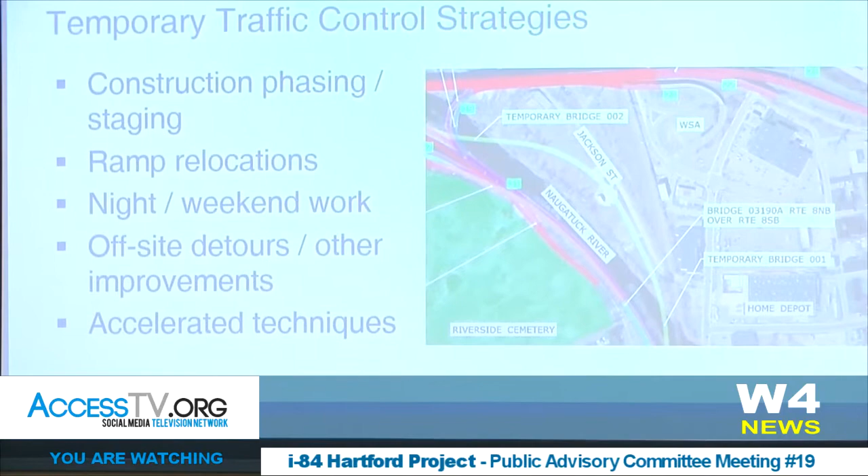So those temporary traffic control strategies really get into the nuts and bolts of the construction staging. This is a cool image that our friends at DOT gave us for something they're doing down in Waterbury, where they're building a big, long, temporary bridge over the Naugatuck River. It's really looking at how you're constructing little pieces of the project and moving stuff around.

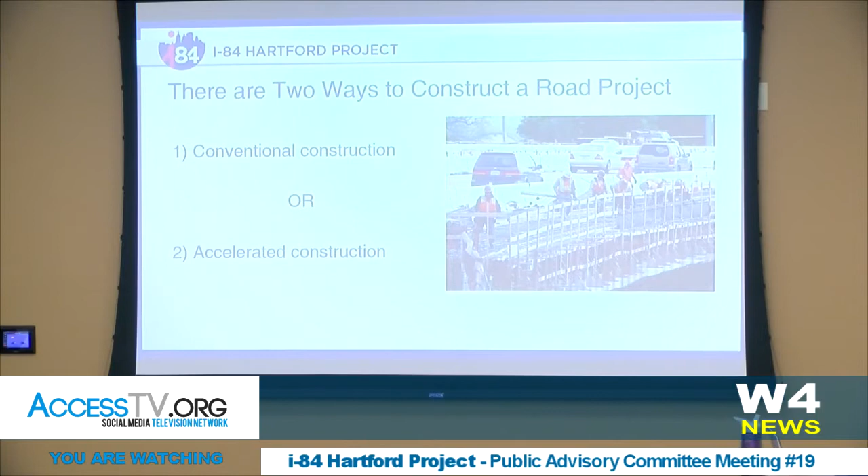When we talk about how things are built, I'll throw out terms: conventional versus accelerated construction. In reality, this project will end up being built as really a mix of both. Conventional construction is based on maintaining all the lanes of traffic, moving traffic over a little bit, building a little bit more. It typically ends up with a longer duration, and can involve lots of temporary roadways or temporary structures, which can add to the construction cost.

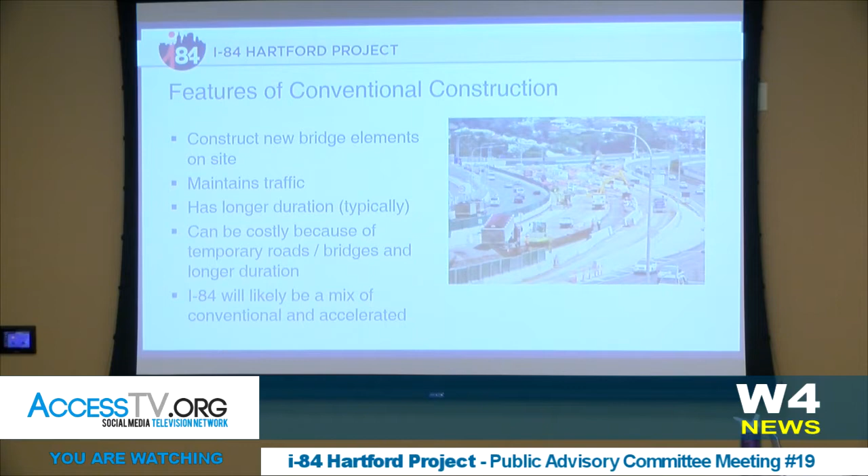Again, I-84 will likely be a mix of that with some accelerated portions as well. There are some examples of recent significant projects around the Northeast done in that same manner, mostly conventional with some accelerated pieces. Many of you are probably familiar with the Q Bridge down in New Haven, the recently completed Waterbury widening on I-84, and of course the Central Artery, where they took down an elevated urban viaduct like we're dealing with here in Hartford.

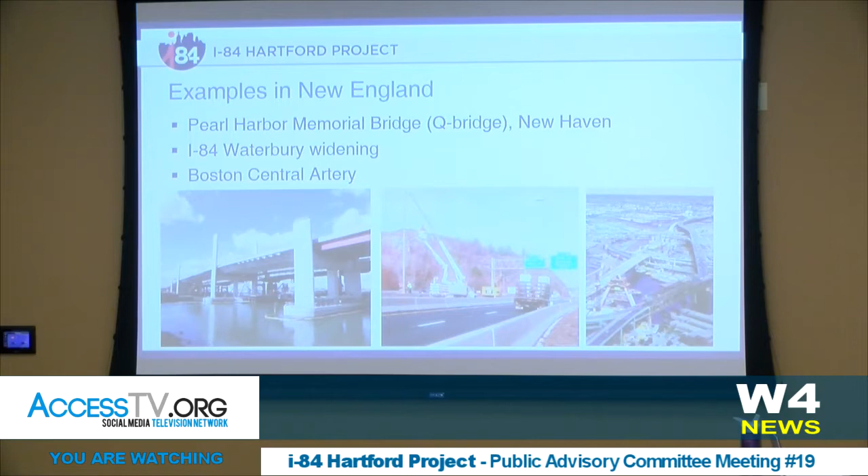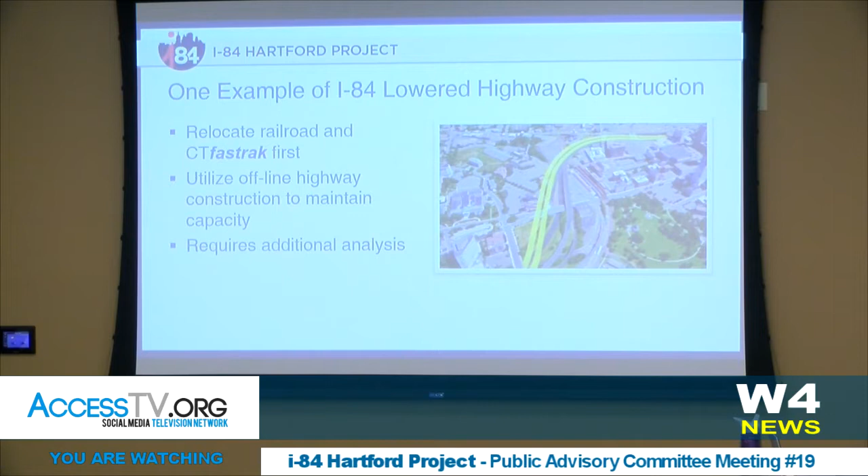So what I'm gonna do is explain the legend, but pick out one key point for each phase and point you to something we think is interesting as we move through the various phases. I don't expect everyone to grasp every significant detail, so again, we're highlighting here. I'm gonna pull up the laser pointer so you can see.

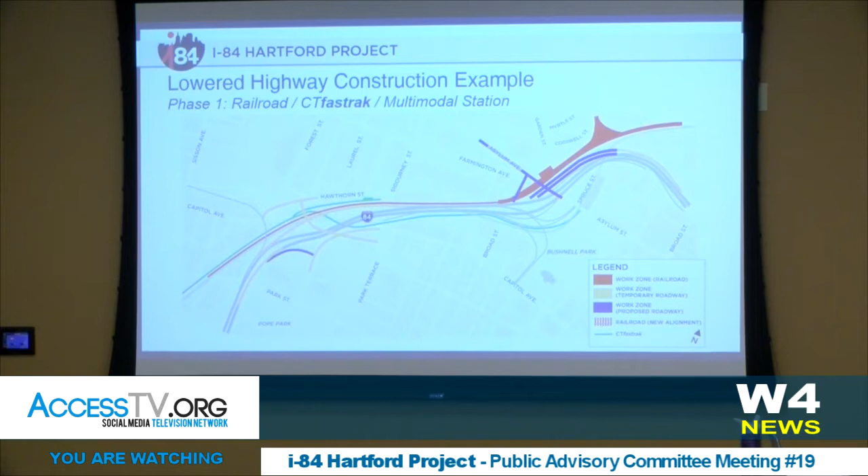We've got some different colors on our legend identifying pieces of work. For example, red is the railroad, blue is the proposed roadways, whether I84 or locals, and orange is the temporary road work. That first phase is really focused on constructing the railroad and CTfastrak, getting those online so they're utilized during construction to minimize single occupant vehicle trips. This phase does include some local road work and I84 work in the eastern part of the project.

For each of these phases, I'll summarize the work going on and show you where I84 traffic would be. For this first phase, I84 traffic would be unchanged. You'd follow existing I84 eastbound, coming away from the I-91 interchange, under Asylum like today, under Broad, and around on the viaduct. No changes there. Where there would be a change with the railroad construction would be, in particular, Capitol Avenue, a local road in the western part of the corridor, because it would be impacted by the railroad construction.

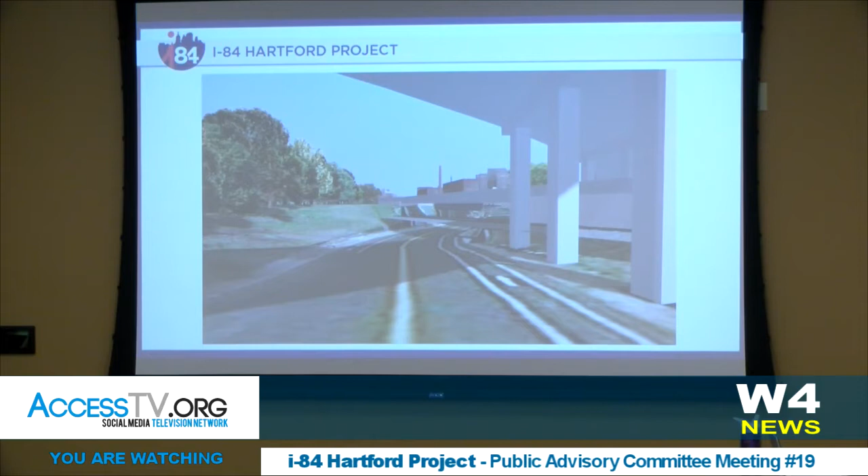There's certainly additional work to be done looking at the various intersections it impacts, but generally speaking, we're looking to provide for that capacity elsewhere as we construct these temporary roads.

As we culminate this phase, phase 1 we expect to take in the vicinity of about 4 years. Given the length of the railroad construction, the follow-on phases are a little shorter, comprising mostly highway work, maybe 1 to 2 construction seasons each. So I'm going to flip back to the next stage and go back and forth once or twice to show you what we're doing.

Phase 2 really focuses on constructing a big chunk of I-84 here in the western part, and then the local road network in Asylum Hill. If I flip back one more time, just to see what's going on there.

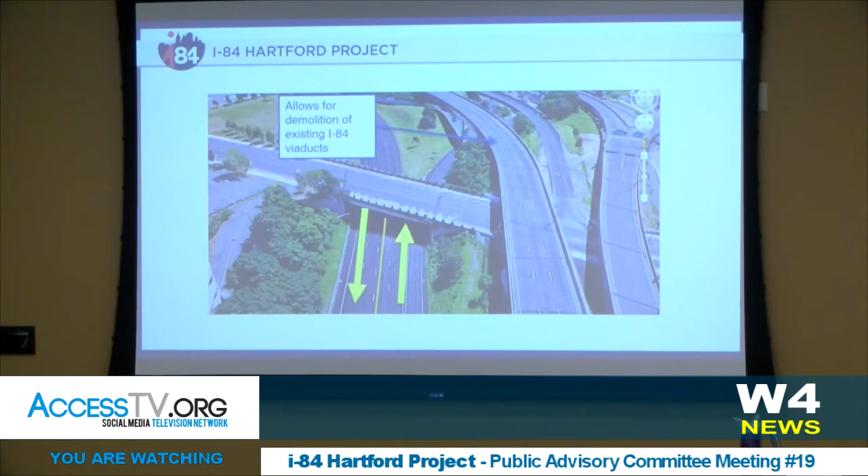This is Broad Street, and this is our existing I-84 westbound. You can see the width of the bridge is pretty wide, because it has this existing on-ramp coming in on the left, from Asylum and Capitol. We're able to put both directions of the highway in there and potentially convert this on-ramp to an off-ramp. The purpose for that is so we can start to demolish those big eastbound viaduct structures up here. This is the existing I-84 eastbound, and here's that off-ramp that goes to Capitol and Asylum. By demolishing those, we can start to build those new local roads in and around the Bushnell Park area.

So then now we're moving west, looking at this stretch between Broad and Sigourney Streets, along with the local roads that cross in those areas. Again, you'll see as I animate this, there'll be some temporary roads in place to move the I-84 traffic out of the way so that we can build. If you keep your eye here, you can see we've shifted things out of the way in order to be able to build that.

And then the last piece, that really completes the lower highway, the I-84 construction. So the final piece is ramp construction and completing Capitol Avenue and some of those local road overpasses, taking them out of their temporary detours or configurations and putting the final condition in place.

One of the things I'd point out here, and I'll talk a little more about accelerated construction in the next couple slides, is that those Sigourney ramps are opportunities for us to look at accelerated construction. Right now your highways come down to Sigourney; in the future, you'll be coming up to Sigourney Street. Using some of these accelerated techniques will allow us to minimize any closures, whether during summer periods or over a weekend, to really expedite the time period and minimize disruption to traffic.

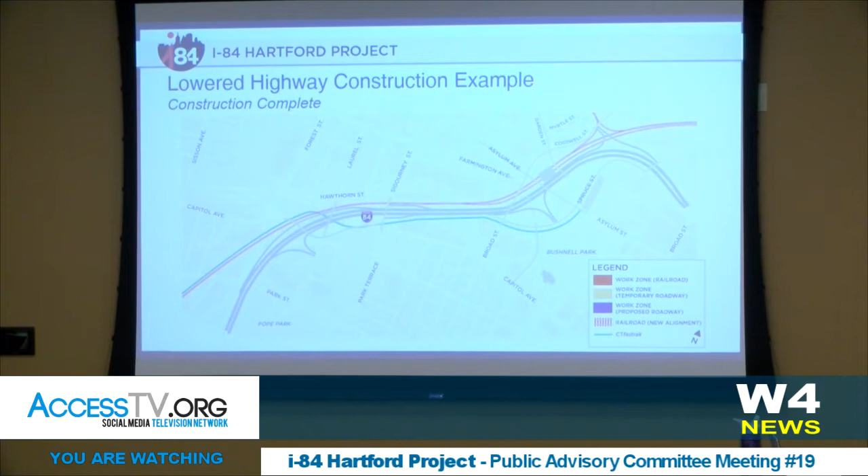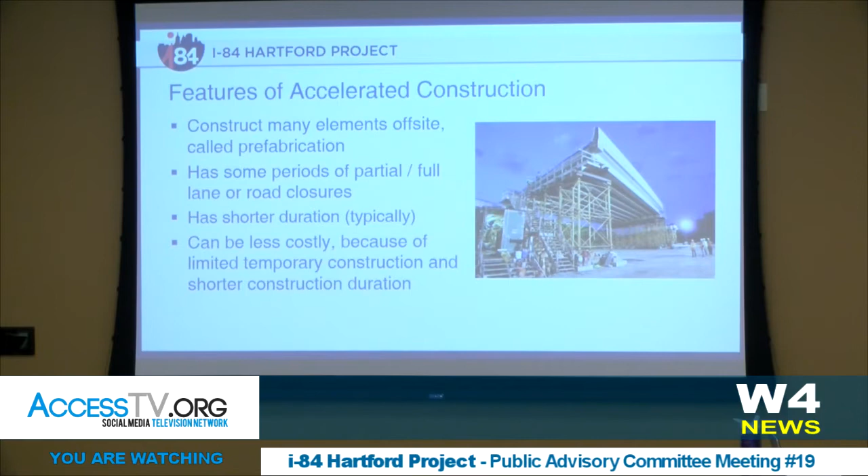In terms of accelerated construction, just to explain a little more for those who may not be familiar, this is where you really look to expedite the construction of certain features, including potentially partial or full road closures, to really let the contractor get in there and work a little quicker. It can be a little less costly, but it can really help reduce the duration and the burden on the traveling public.

Some good examples here from around the state. Many of you may remember just a couple years ago they did I-84 down in Southington, the Marion Avenue bridge over it. My wife made fun of me because I went down from our house in Bristol to watch some of that. And then there's also one going on right now, Route 1 in Stamford, as well as for those of you that drive on 91 through Rocky Hill, you'll see the bridge between exits 23 and 24.

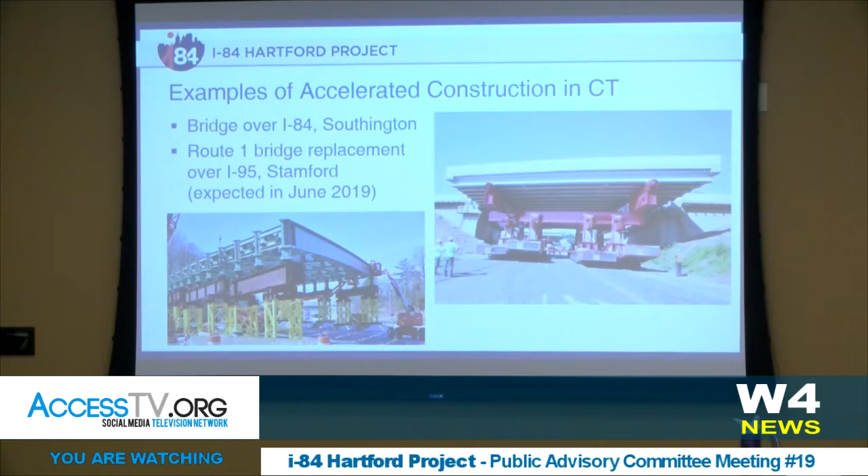So again, the summary for what I went through is really to drive home that we think we've identified a feasible, practicable way for this to be built. There's certainly still details to be worked out, and that will happen as we start to work with our new next generation traffic model that we've been coordinating with the city on developing, which we'll use to test these different phases and make sure we're adequately moving traffic around the city. Again, that mix of conventional and accelerated elements — we really feel this doesn't have to have a negative impact on the economy and the people of the city.

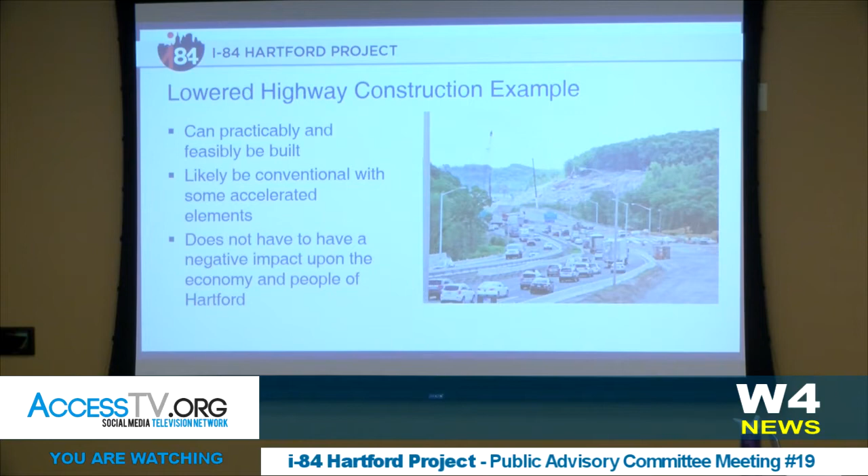And to that end, we've worked with our partners at Federal Highway — thanks again, Ted, for providing these. We have just a couple examples, and I think you guys have printouts with all the links, so I won't go into every single case study we've done, just one good example of something positive that can come out of these projects.

That's on I-80, the west approach of the Bay Bridge out in San Francisco. They had done a big seismic retrofit and essentially had to reconstruct the whole thing in the aftermath of the Loma Prieta earthquake. That carried about 280,000 vehicles, well above what we did. They rebuilt it in place over about 6 years. One of the big successful results was the number of minority and women-owned small business enterprises that came up — such a big contract, and all these federal aid contracts require a significant DBE presence. This really enabled several successful firms to start up, and they've carried on and are still successful today. So that's just one example of how this can be a positive impact on the economy.

And that's just a set of newsletters from their project.

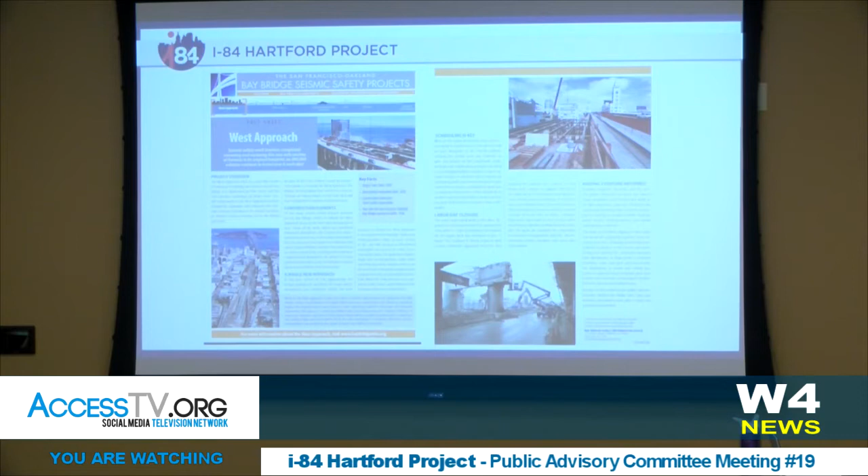So yeah, I talked a lot there about temporary traffic control — that was just one of the family of strategies. The other one is transportation operations. This is really looking at the broader transportation system and how you can improve other modes, how you can ensure there are other ways for people to make that same trip, or whether they even have to make it at all. It could include — I'll talk a little about transit on the next slide.

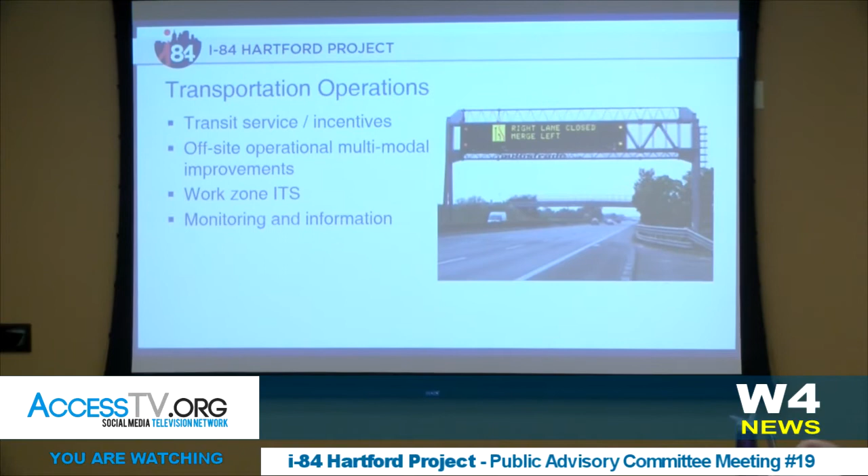It talks about communicating through the DOT's Transportation Demand Management Center, understanding where the delays are and getting that out there, along with other options for people to take. One of the big points of having that first phase include the railroad and the CTfastrak construction is to make sure they're open during the highway work, so people have an option to take another way into the city to come to work.

Certainly a lot of other municipalities or states have looked at potential fare reductions — that's something we'll consider here. And then there's promotion, making sure people understand that these opportunities are all out there.

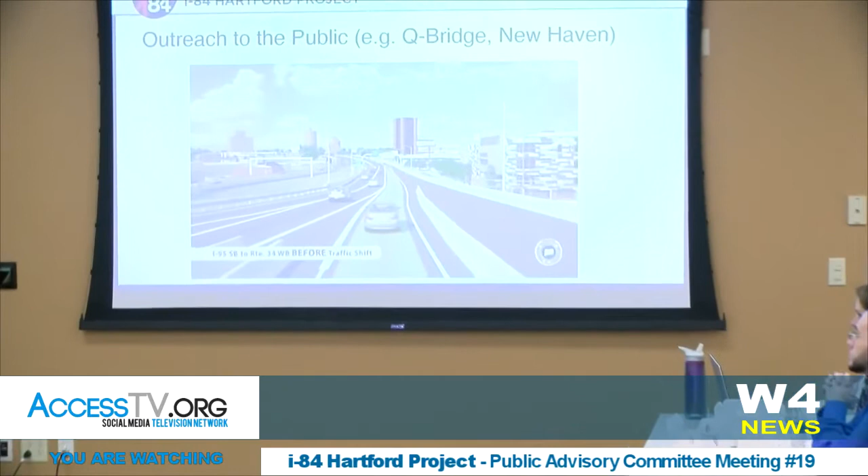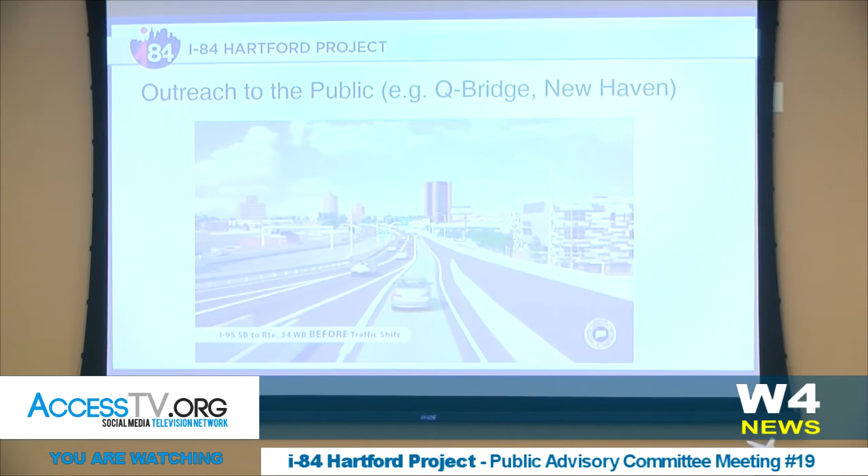Unfortunately this video, which I tested about 10 times back at the office and 5 times at DOT, doesn't appear to work here, but if you take my word for it, it's from the Q Bridge. Basically, when they had a major traffic shift, they'd publish a little video on their website showing how to drive that new transition. This one, for example, was for if you were going on I-95 southbound getting off onto Route 34, which you were used to doing a certain way for years. It was published well before that traffic shift took place, so people could envision what would happen under the new scenario.

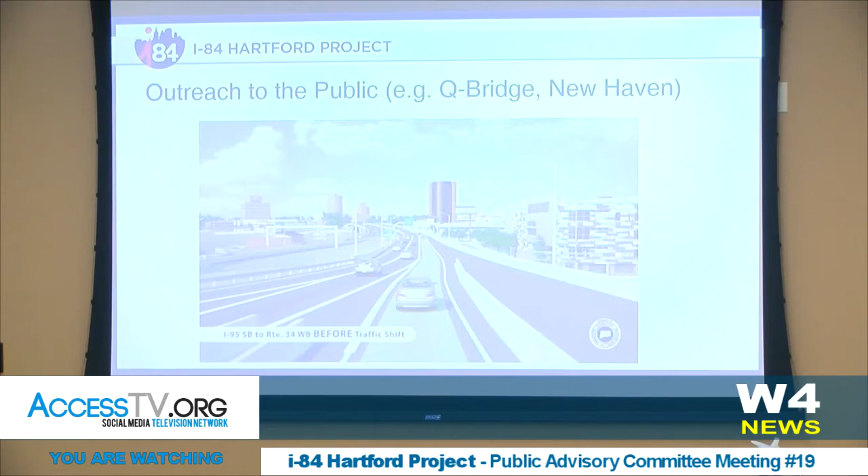That is part of the broader family of tools focused on public outreach — making sure the general public, as well as specific motorists, understand the options we just talked about and how they can use them. That includes press, media, and especially today social media, communicating traffic shifts well in advance so people understand them. If there are any temporary closures, that would also be well communicated so folks understand what's happening. I'm sure the set of tools we'll have at our disposal will be different from a technology perspective than what we have today.

We will make a pledge to stay up on best practices and adhere to what the best tools of the day are. And again, that promotion of other modes, like transit, will be really important in minimizing the number of trips. And then coordinating with the major employers and key stakeholders, the folks that know the people who are coming into the city and where they're coming from, making sure we work with them to help understand how we can help get folks in and out in the most efficient manner.

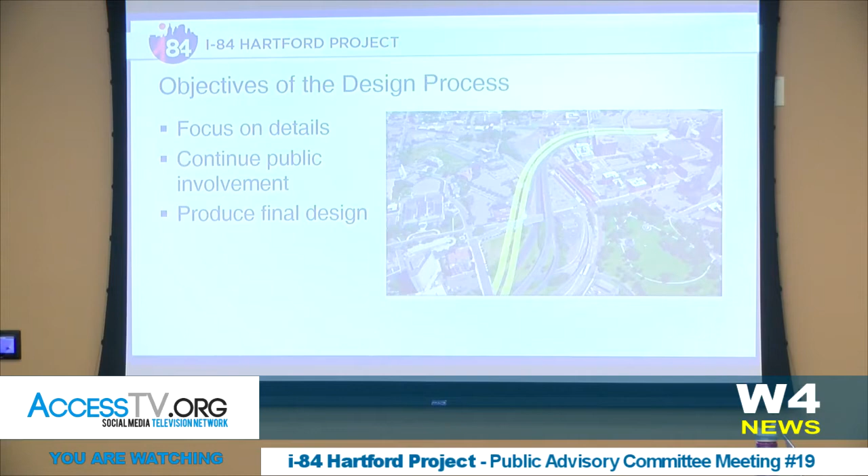So with that, I think I'm going to turn it over to Kevin to talk about next steps, unless anybody has any questions. Oops, she already got there.

As Christine said, we're at a point where we're in a production phase of the EIS, after these many years of working towards getting input and doing analysis, and a lot of it is now in production mode. But while we do that, there are ways the public stays involved, where we're going to continue providing information through our e-bulletins, newsletters, and such.

As we go through and publish the DEIS, that's the opportunity for review and for the public to attend the hearing and go through the process they talked about. Just to reinforce that, she identified the different stages of the environmental process, and the public involvement process will continue as we take these details into design.

And with that, if there's any questions, if not, we'll look to go on to the city. And where is Casey to shut this one out? Cityscape, okay. So Sandy will want to come up, and the city will go over their work on their capital gateway master plan. Just use that, or you can use that if you want. Do you want to use the laser pointer? No. All right, well, thank you.

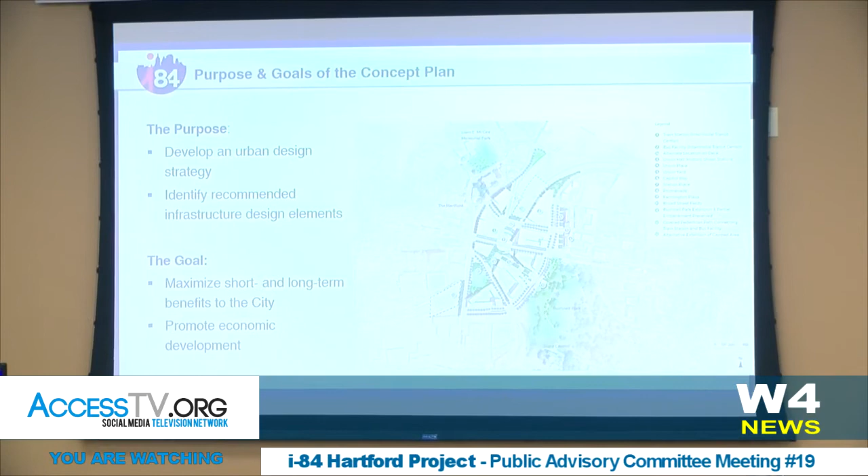So really the purpose of this effort was for us to develop an urban design strategy, and also identify recommended infrastructure elements for I-84 and beyond I-84. The goal is really to maximize the benefits to the city of Hartford, which means promoting economic development, situating ourselves so that this project gives a good return, and capitalizing on the investment being made in 84 to really knit the city back together in this area, ending with a really large benefit for the city of Hartford.

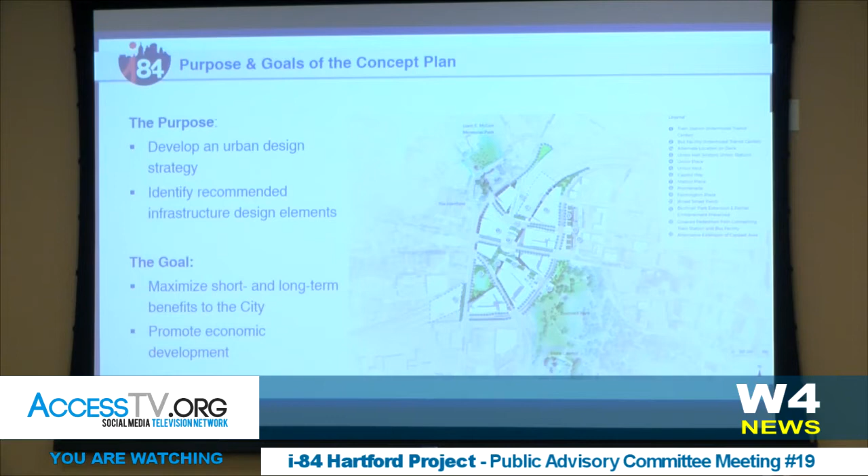The consultant who assisted us in this work is WSP, formerly Parsons Brinckerhoff, and if you've been coming to all these meetings, you've heard them speak. There were a couple different elements of the work they did. One big piece was peer review, looking at the work coming out of the I-84 work, but that's being done for the state DOT, and the interests and goals of the state DOT are a little different than the city's. This gave us an opportunity to look at everything with a different viewpoint through the consultant's expertise, looking at where the ramps were located, local access, the Intermodal Transit Center location, and how we can put this together to improve placemaking.

We worked with the DOT team throughout the project and came up with this Capital Gateway concept plan, which I can send a link to DOT that can be sent to the PAC, our final Capital Gateway plan, which has several elements: strategies for what we wanted to see happen there, infrastructure recommendations, design guidelines, and financing and implementation strategies. I'll talk generally about how these elements came together to create this plan.

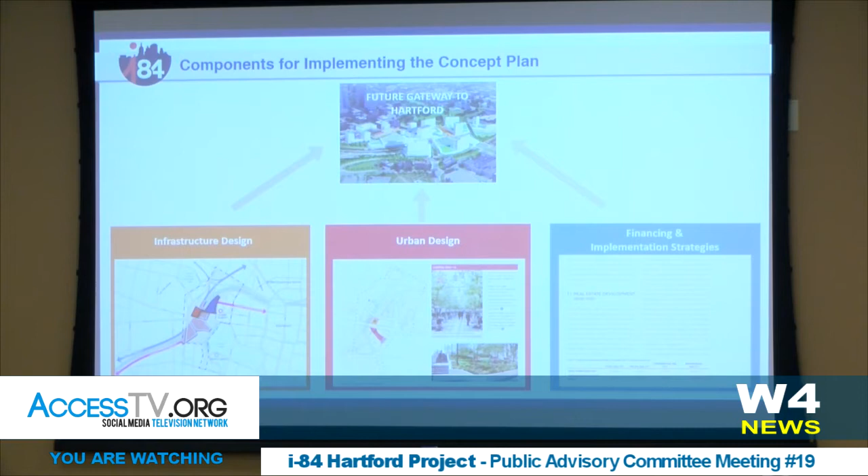In terms of infrastructure design, there have been three different elements: what do we want the urban street network to look like in this vicinity, where should the Intermodal Transit Center be, and how do we make that CTfastrak connection. These to us were all the key elements in this central area. We're talking from about Broad Street to north of the proposed bus center as the area of the Capital Gateway, as we've defined it.

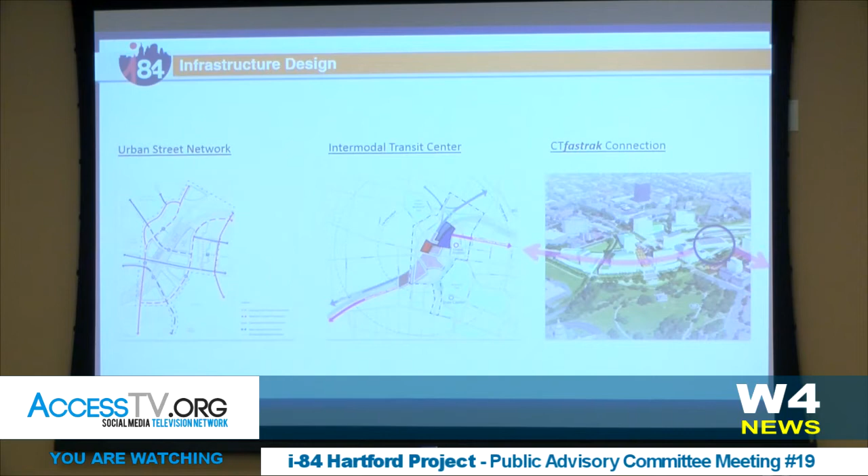In terms of the urban street network, some of the things we came up with out of the peer review that we think have improved the overall project for all parties: number one, to extend Garden Street. If you remember, there was a time where a Garden Street extension was not included as part of the project. Our consultants were able to assist with figuring out how the grades would work and how that could work to the benefit of the project.

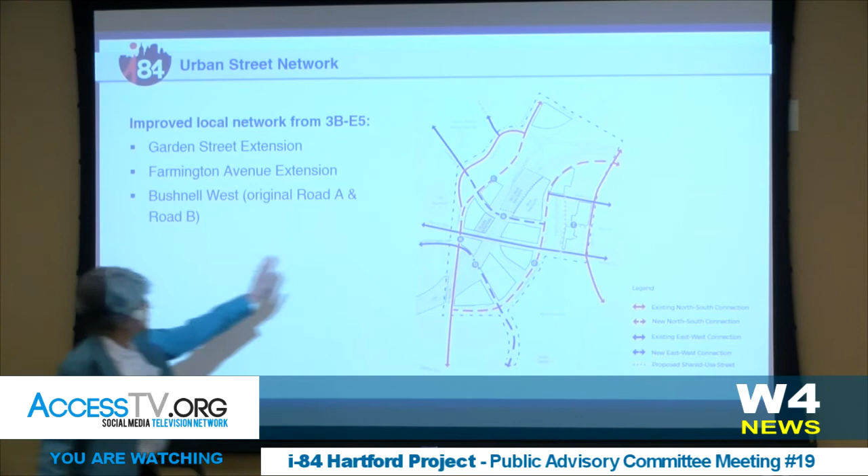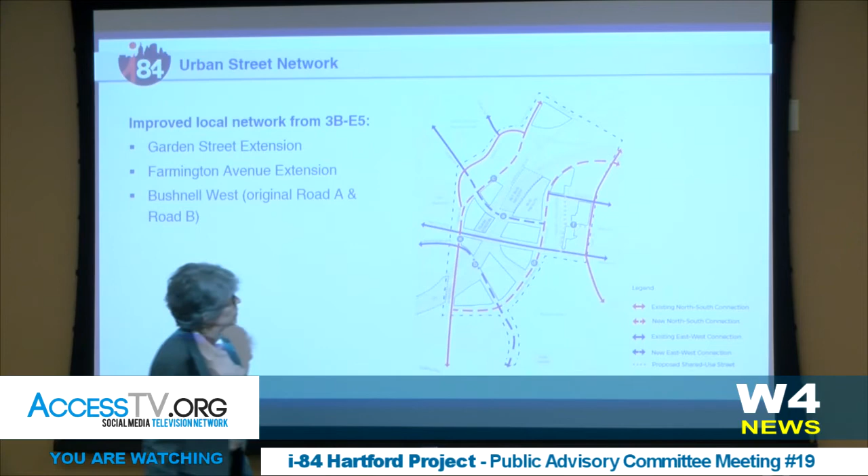We've also identified the importance of a Farmington Avenue extension. Farmington Avenue, rather than intersecting with Asylum, turns south and connects with the new roadway along the edge of Bushnell Park. We think that's important to improve the developability of some of the ground made available as part of the project. Bushnell West had been called Road A and Road B, two separate roads. Now it's one road that makes close to a 90-degree turn there.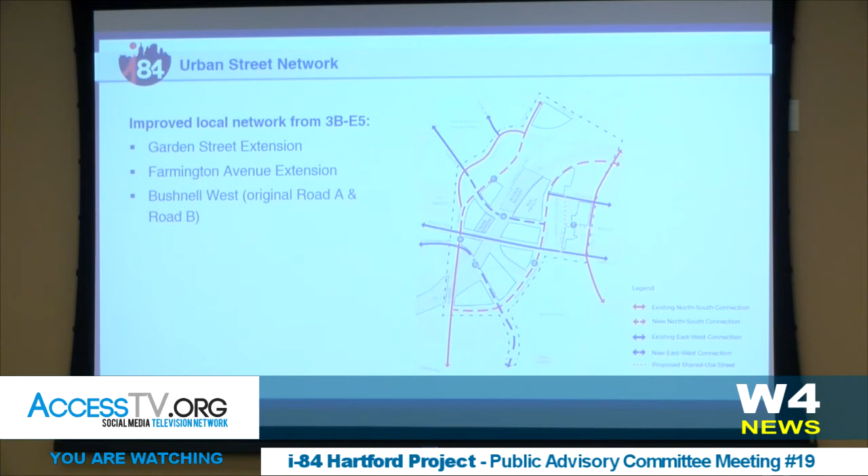Can everybody tell what I'm talking about? Should I use the laser pointer? I'm not good with laser pointers, that's why I'm hesitating to do that. You can tell? Okay.

Next, looking at the Intermodal Transit Center. It actually consists of two separate facilities: the relocated train station, located north of Asylum Avenue above the newly relocated train track—that's the red square in this drawing—and the bus facility, which would be located either just east of the lowered highway, or over the highway, shown in blue. The solid blue is the bus location; the slashed blue is an alternative location over the highway. There's some question as to how Homeland Security and other agencies view locating a facility like that over a highway, so that's why we're showing two options.

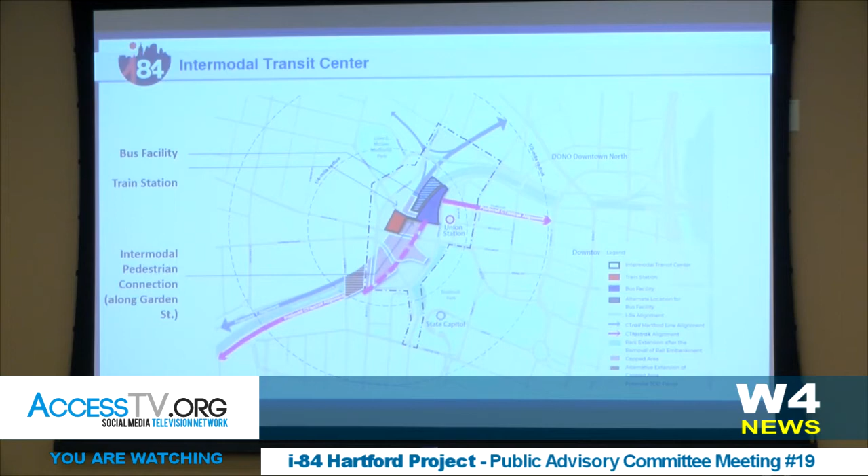What's really key with this whole idea is these two facilities need to work as one, as an intermodal center. We've had the train facility and bus facility coincident for a number of years, and we don't want to lose that value. We know a lot of people value that—it makes it a more powerful connection. So the pedestrian connection we make along Garden Street between these two is going to be very important. We want it to feel like when somebody arrives at the bus center, they've arrived at the intermodal center, just walking down a corridor to get to the trains and vice versa—the kind of distances you walk in other train stations or in an airport. We think it's workable to have it designed that way.

CTfastrak is really essential to the intermodal facility. We believe it must connect to the intermodal facility. It seems most feasible for it to connect to the bus facility, make all the transfers at that location, and make it very convenient for people to go from the busway to the train and vice versa. So we are showing the busway coming underground into that train station and then continuing downtown along Church Street. DOT has shown some other options for the busway, but we believe this one will work most effectively for the transit service and will be most beneficial to the Capitol Gateway.

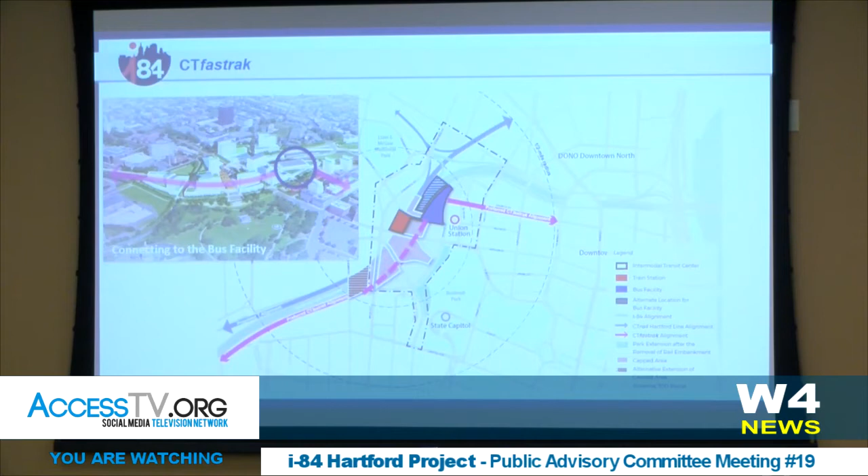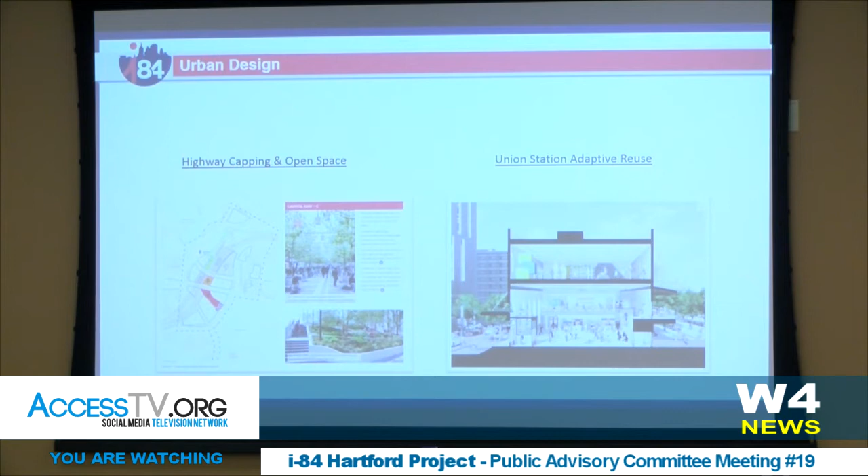The next couple of things we looked at in terms of urban design were related to highway capping and open space, and then the adaptive reuse of Union Station.

In terms of capping considerations, we wanted to mitigate noise and visual impacts. We did not want to build a lot of buildings on the cap because we know how difficult and expensive that is. But we wanted to use the capping to attract Class A type development in the terra firma, on-ground locations where development could be supported. With just one exception, right across Asylum Street from Union Station, we would not propose any building on the cap. At that location, we think it's important that there be some type of building there—it's a key gateway into downtown.

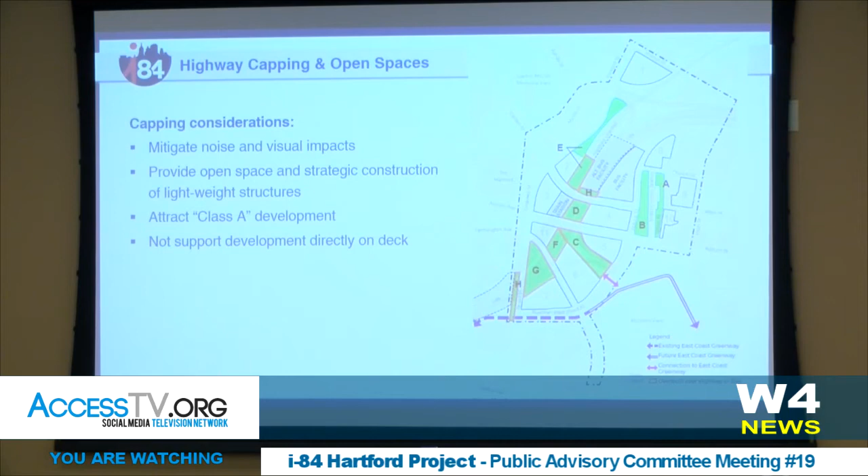So I'm going to go through the variety of different open spaces. I'll go over it pretty quickly, but just to show you some of the thinking behind them.

This red shaded area is what's being called Capitol Way, Area C. That would be built over top of those ramps that are exiting from the highway, and they exit right opposite Bushnell Park. So it's important to mitigate the noise and visual impact of those ramps. You can see Area 5 and 6 to either side of that—those are really premier locations for redevelopment potentially to take place, and this will help give that a better chance.

What we're also proposing is that the brownstone wall at the park would stay in place opposite these ramps, because it's very important that we have that sheltering of the headlights coming off the highway into the park. But we expect that most of the brownstone wall and the viaduct will be removed as part of the project, not being necessary, and actually opening up this space into Bushnell Park. The view into Bushnell Park will be really important. If Capitol Way is just sitting up on an elevation separated by a wall from the park, it's a very different concept than Bushnell Park North and how that integrates so well with the park.

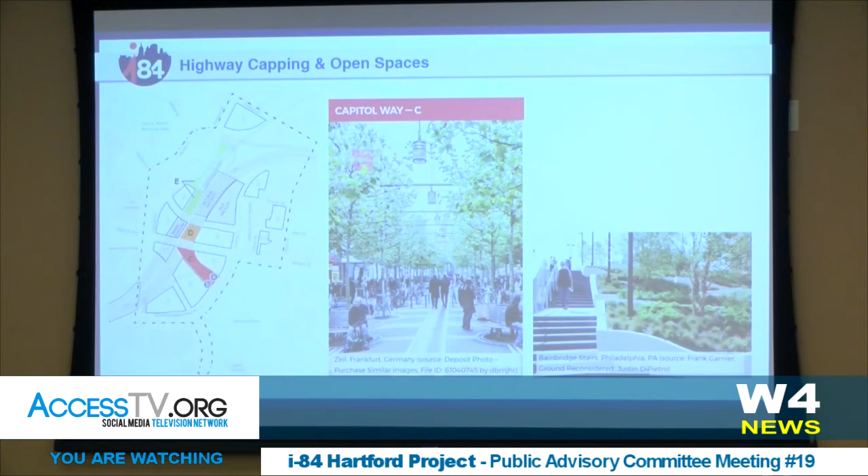The next area is what's called the Promenade, these green areas labeled E, and this ties the whole development up into the Asylum Hill area. It's more of a promenade than a park, and ties that area into the train station also.

The next area is what we're calling Farmington Plaza, Area F. That is over the highway. It's designed to be an active plaza.

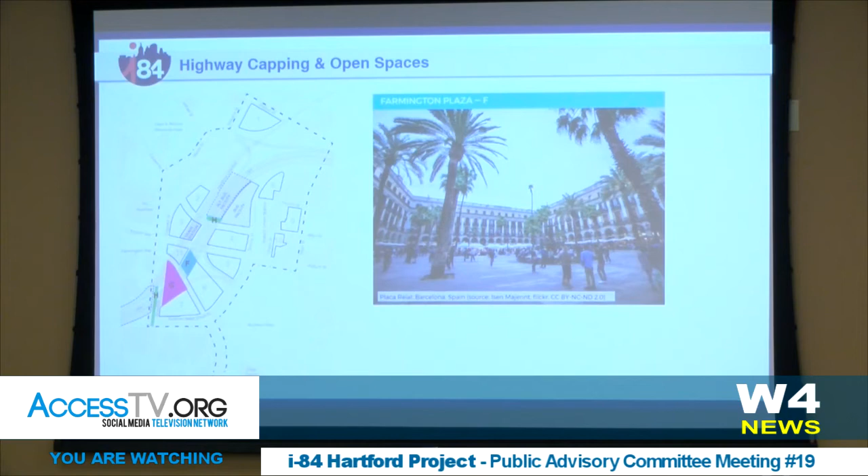And then finally, we have an area called Broad Street Fields, this is G. It would be a large expanse of open space, and the idea would be that it would need to be activated with some type of athletic use. And then we're showing Area H, a planted buffer along Broad Street. However, one of the changes that the P&Z Commission asked us to add to this plan is the idea that the capping over 84 continue to the west side of Flower Street. That's what that dashed line is showing off to the very western edge of this drawing, over top of the lowered highway.

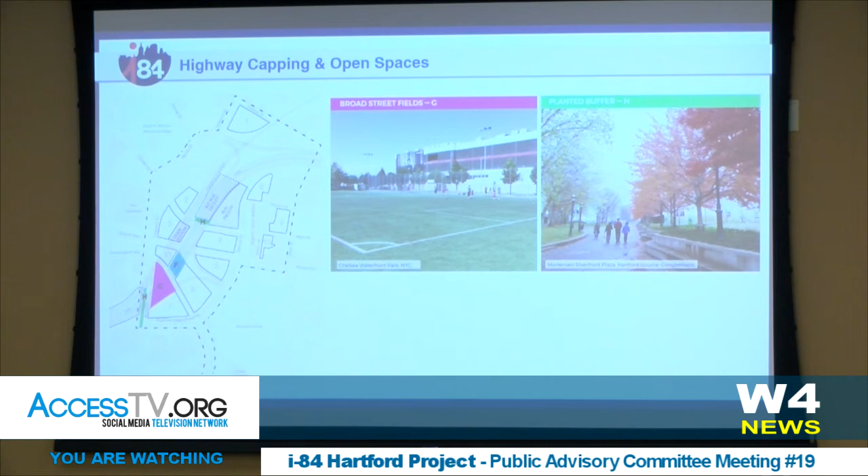Finally, Union Station adaptive reuse. We want to see this be sort of a 24/7 kind of area with some flexible space for public programs, restaurants, classrooms, studios, exhibit space, small-scale office.

The way this works with the surrounding streets, we're looking at Union Place becoming a shared street on that side of the station, and on the Spruce Street side, there's now a larger expanse of ground since the buses are no longer there, and the elevations have changed so we will be level coming into the Great Hall.

This concept is showing the modern addition to Union Station having been removed, and rather than having stairs up into the Great Hall, because of the change in elevation of Spruce Street with Garden Street coming down, we'll be able to access directly into the Great Hall, which creates this space called Union Yard on the west side of the station.

That can provide places for cafes, for activity, more of a pedestrian space. And I have to confess, usually it's landscape architects and economic development people who make this presentation, so an engineer doesn't quite have the same flair with the material.

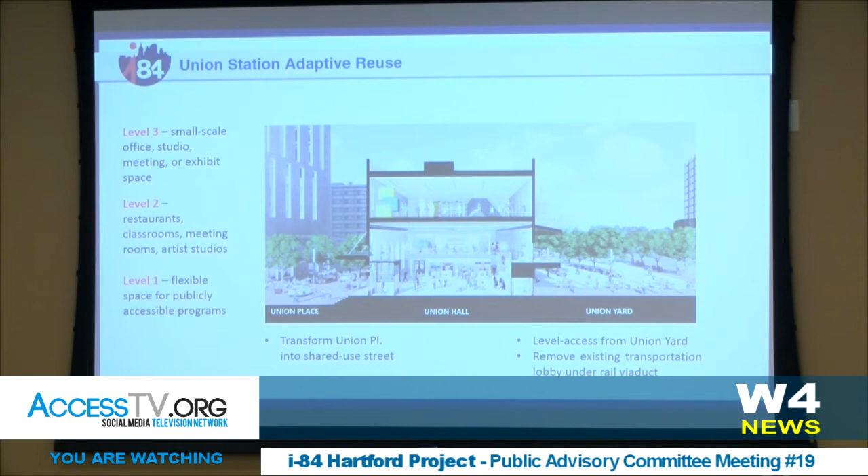Looking at financing and implementation strategies, this kind of project would need to be supported. If we look at what we're projecting could happen in terms of development, the development proposals here, this would require Hartford growing at a significantly faster pace than it has been to this point.

But we think there are some opportunities to leverage the insurance cluster that we already have and the innovation place kind of efforts that are underway to move it forward. But it's not a done deal that the city could see all this development take place. And I'll show you some concepts.

We'd like to look at our zoning and see how we can optimize any of our TOD overlay zones. The improved train station and bringing all the transit together will help provide greater impetus for TOD. And we already are getting questions from people who own property within the half mile of the proposed train station.

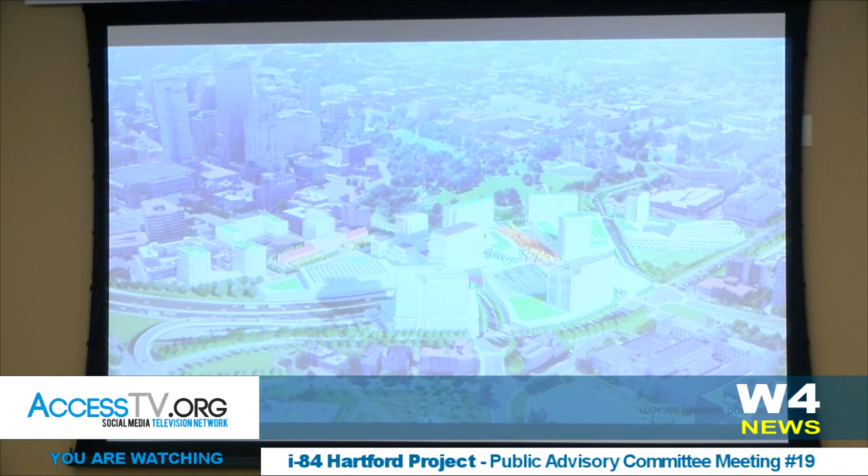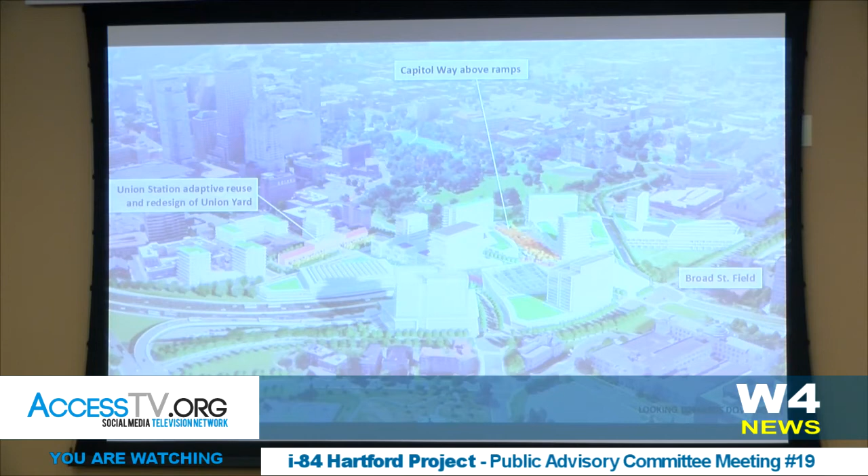So from here you can see that Capitol Way open space that's over the ramps and the Broad Street field, which would be the large open space piece.

So finally, I just want to point out, if you look at this drawing, you can see this gives us a lot of opportunities. If you look at the depiction on the left and go south of our area of interest, opposite Bushnell Park, behind the LOB parking garage, it looks like there are more opportunities to try to create greater place over there, in a place that's just the back door right now.

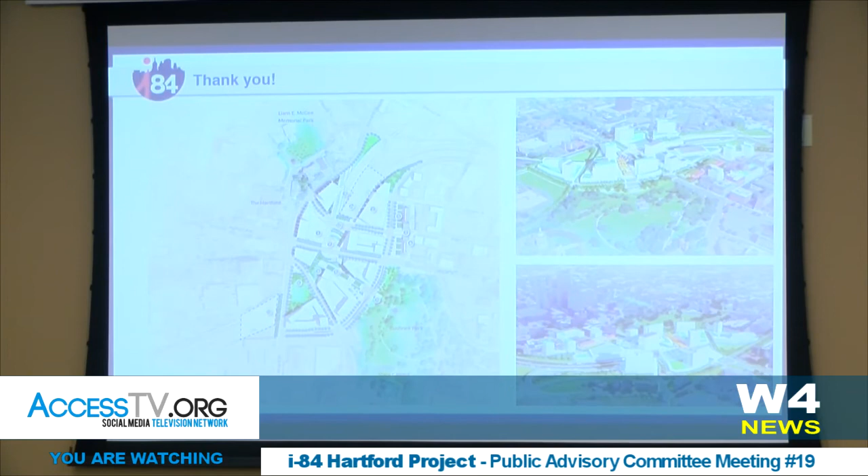The back side of the LOB parking garage also offers a place where we can continue this concept. And I want to thank Bill McCauley for pointing that out and sharing some drawings along those lines to get us thinking about that. So that is the end of our presentation. We'll send some information so you can take a look at the report itself if you're interested and dig deeper.

Does this have to be formally accepted by the DOT? That would be a question for the DOT. I think City Council is going to be adopting it at their next council meeting. It's slated to be adopted.

So to answer that, and all of this that's gone on with what the city's doing and what other input we've gotten from stakeholders is part of what we're considering and incorporating into the DEIS as far as any other stakeholder input. That's pretty much how we're looking at this plan. It's not something that's going to be looked at separately. It's part of the whole alternative analysis and environmental impact process.

So the land that's created above or on the caps will be owned by the city of Hartford or owned by the state? There's a lot of things to be done. We're not at that point in this process. We're looking at the impacts when it gets into design, and we'll see how things flesh out, and all things on ownership and stuff could flesh out down the road there. That's not the point we're at.